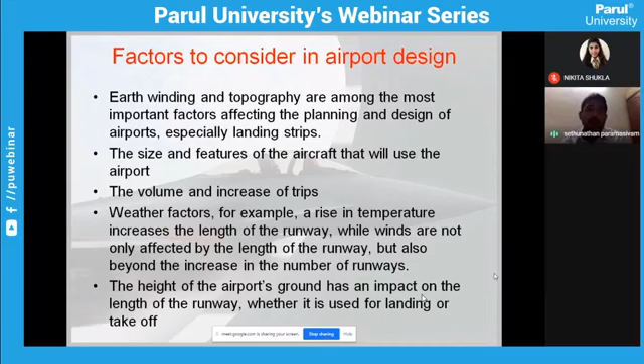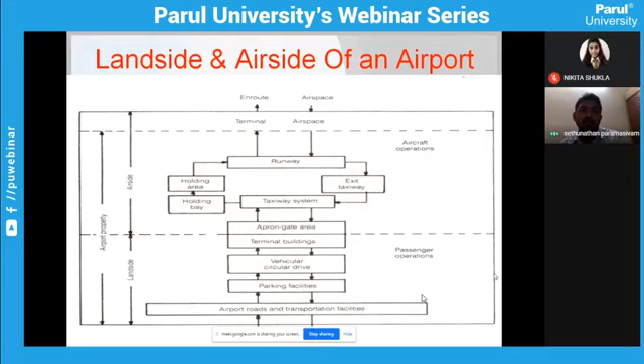We'll explain a little more between the slides - there's lots of explanation for this. I'll just take a few example airports, so it's easy for you to understand. There are airport types based on the type of aircraft - maybe single engine, multi-engine, medium jet, heavy transport, or general transport aircraft.

For example, if you take Delhi Airport, it's open as a general transport airport. The reason is you can land and take off any type of aircraft in any situation, because of the lighting systems, runway condition, and weather forecast - everything is applicable for that.

A very important thing everyone is supposed to know - this is the ICAO rule, the convention of the International Civil Aviation Organization. This aerodrome and airport design comes under Annexure 14. Everyone is supposed to remember this if you think about airport and aerodrome design. Annexure 14 includes lots of chapters below it.

Volume 1 states aerodrome design and operations - there are 10 chapters included in that. First is general, then aerodrome data, physical characteristics and obstacle restrictions, visual aids for navigation, obstacle clearance, and electrical systems. These are all the major criteria coming under Annexure 14 about aerodrome design and operations.

Airport terminologies - everyone knows about the terminologies, I think most things are familiar. Terms like airfield, aeronautical beacon or aerodrome beacon, apron, approach surfaces and blast pads, clearway, displaced threshold, and so on. And then planning.

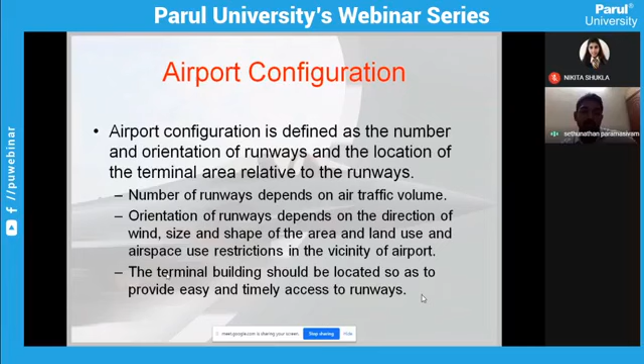That's why it's called an airport layout plan. And airport configuration, we already talked a little bit about that, so I won't mention the same thing again. The major factor you always need to concern about is the size and shape of the area. That's a very important thing. And terminal buildings, and airfield concept.

That is, for example, in Bangalore, we have parallel runways. The major purpose of that is to reduce traffic, because today the aviation sector is booming, so there's lots of traffic. You can't manage with a single runway. That's why they depend on parallel runways, called parallel runway, 4 left and 4 right.

For example, if the airport has three runways, they mention one more runway in the center, normally mentioned as 4 Charlie, which is nothing but 4C. That's why it's called 4 left, 4 center, and 4 right.

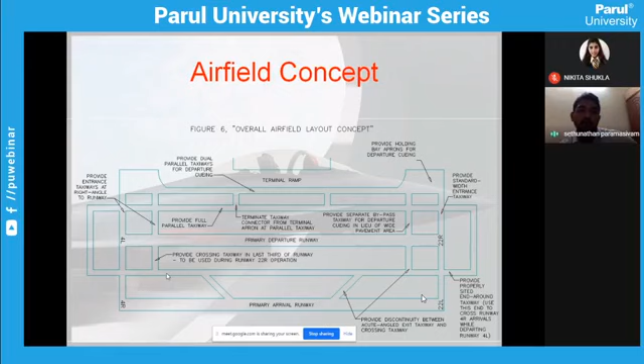In case the wind is not favorable to 4 left, the departure happens on the opposite runway. That's why you can see on the right side, 22 right and 22 left. This is the way the airport layout can be analyzed for whether it's for departure or arrival.

Again, we further move ahead with this. This is the basic thing you need to know. I'm not aware what kind of students you are right now, because you may not have the idea how they construct this runway design.

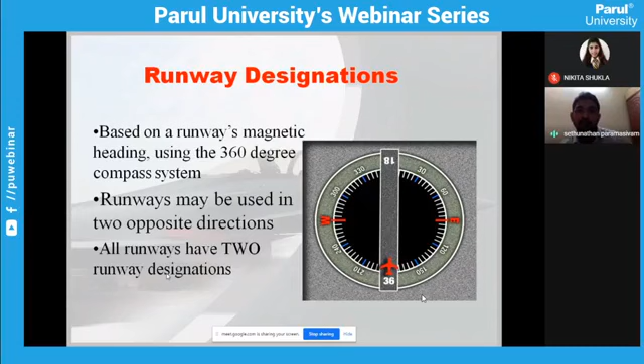On runway configuration, there are lots of runway configurations, whether it's a single runway or parallel runway. For example, single runway at Vadodara, and so many available in India. Most major airports have single runways and parallel runways. In India, Bangalore has parallel runways, Shamshabad Hyderabad has parallel runways. That may be two parallel runways or four parallel runways, but we don't have much four-runway setups over here.

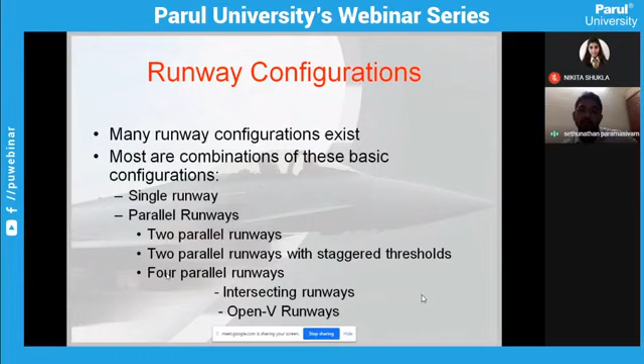And open V type, maybe open V type, we can see right now, I have some pictures. We already explained single runway. If the airport has less traffic, less passenger travel, and no much cargo transportation, they use a single runway. In future, if needed, they will extend the runway to a parallel runway, another parallel runway, or give a cross runway like in Chennai. We'll go with that slide for the cross runway.

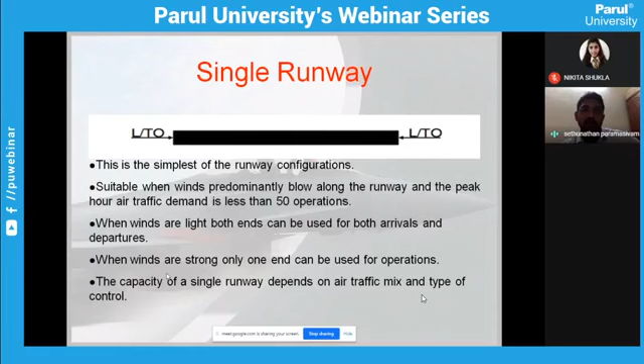You'll get a fair idea about it. And four parallel runways - we don't have four parallel runways here in India because we don't have much space and facilities over here. That's why we don't have that four parallel runways. Right now we have two parallel runways, and converging runways we have in a few airports.

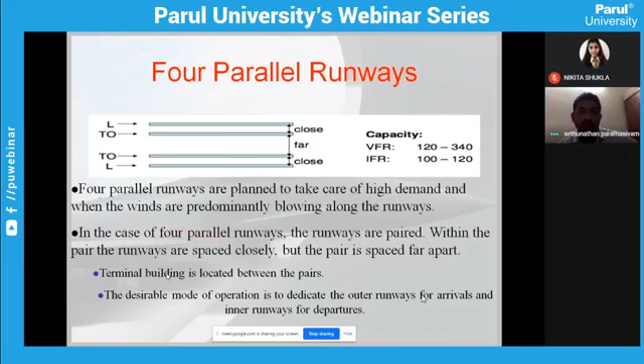This is an example for your understanding. This is Los Angeles, California. You can see in the right top corner, Los Angeles, California, you have four parallel runways. That's nothing but you can see from the top, you can see four dark lines, right? 1, 2, and 3, 4. This 4 is runways, usable as 6 left and 6 right. And if you come to the bottom, it's 7 left and 7 right.

The reason they are using this here is it's a very huge runway. The major reason behind this is huge traffic. This is the major airport in Los Angeles, California, that's why the transportation of people is much more. Even the airport design is more complicated. If you go ahead with the design, even the terminal building is not a single terminal building. I've explained this further in the upcoming slides. You can see that. This is a little bit messed up, but you need to understand a few things.

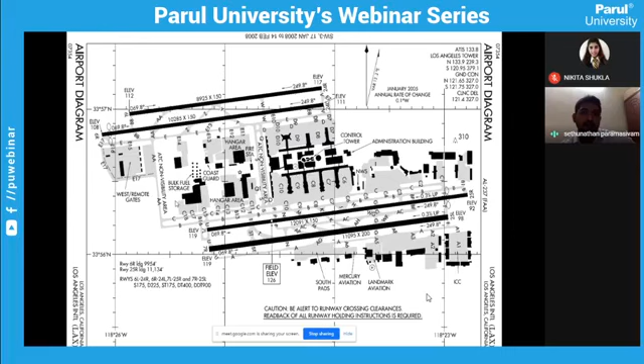The importance of parallel runways is you can use all four runways for departures and landing. There are no restrictions because you have sufficient wingspan distance for aircraft to land and depart on both runways, since there are different instrument procedures and air traffic control services available for these runways. That's why there is no delay in departures and arrivals.

That's why they give this kind of configuration. This is the configuration of parallel runways - closely spaced, intermediate, and far spaced. This is nothing but the spacing between the runways. You need to have the minimum width to avoid the wingspan touch. You know aircraft wings have very huge dimensions. If the aircraft is supposed to land on the parallel runway, the wingspan needs to be sufficient.

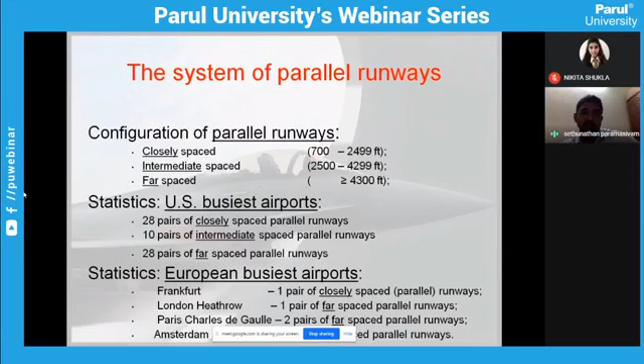For example, I've given some statistics of US busiest airports and European busiest airports. You can see a few of the US busiest airports have 28 pairs of closely spaced parallel runways, 10 pairs of intermediate, and 28 pairs of far spaced. And a few from Europe you can get from Google about the statistics of the busiest airports. The systems of parallel runways - same thing I already explained.

This is the intersecting runway. The drawback of the intersecting runway is, if one runway is in use, you can't use the other runway as a parallel runway. For example, you can see this.

You can able to visualize, Nikita. I can move the slides with the hand cursor. Nikita, are you with me? Hello. Yes, sir. Okay, fine.

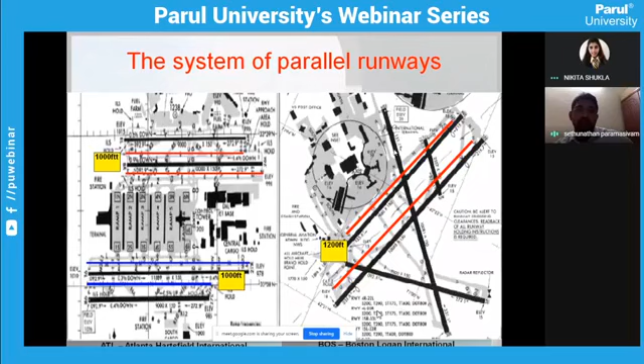That's fine. We have two parallel runways, but we have two intersecting runways. Normally, when wind conditions are favorable, they'll use only these two parallel runways. In case the wind is not favorable for these conditions, they will use the alternate runway for departure and takeoff. Further, with the approach glide slope - which you may have studied in your degrees - for parallel runways, they're supposed to have an approach lighting system to identify which runway you're supposed to land on while coming for the approach, whether it's a 3-degree glide slope or 5.5-degree glide slope at the maximum.

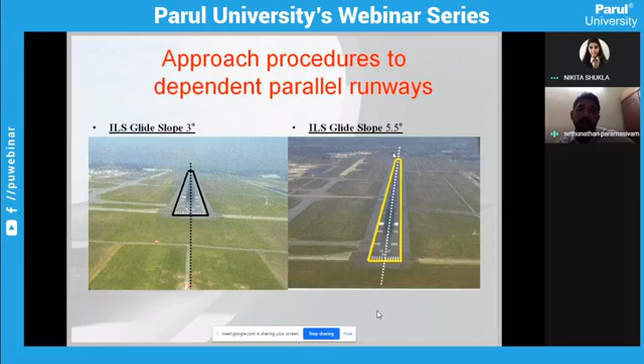This is the single runway configuration. We already explained the designator. This runway is located between 27 and 09. This is nothing but 27 plus 180 is the opposite, and again 09 plus 180 is the opposite. This is the way you need to calculate the runway designator.

If you see a few things, the airport beacon is in the right top corner because all the landings and takeoffs are supposed to be monitored from there, and this is the ramp area to park all the aircraft. The taxiways - most airports are supposed to have parallel taxiways because it's easy for the aircraft to vacate via the rapid exit taxiway and taxi out via the taxiways. There are lighting signals - I have a few slides about this also. We already talked about the wind sock. If you go and see each airport, you're supposed to have the wind cone, which gives the direction of the wind and the speed of the wind direction.

Depends on that, we always take off the aircraft into the wind, not in a tailwind condition, because tailwind is unfavored for takeoff or landing. If it's a tailwind, your aircraft will take a long distance to roll out and stop, which is very dangerous in case there is a possibility of overshooting the runway.

That's why we always suppose to do the takeoff and landing with headwind conditions. We have VASI and PAPI, which is nothing but a visual approach slope indicator. Some few airports have the indicator called PAPI. The PAPI and VASI are alternate usage. This is for your overview.

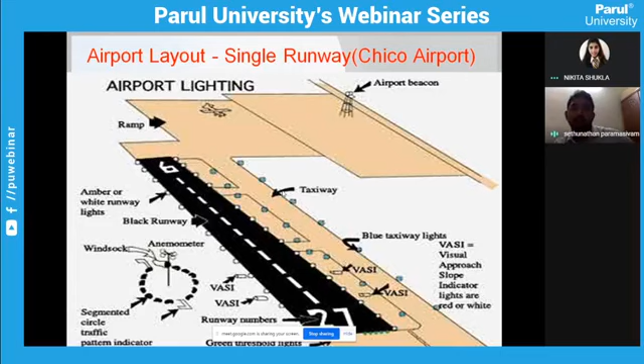I've given this outlook, and a few more things, the lighting system, I can explain here itself. If you can see the edge lights of the runway, you can easily identify with the white light, because you're not going to confuse the runway and taxiway even though both look like parallel ways. The runway is always located with white edge lights, and the taxiways are supposed to have blue edge lights. It's the easiest way to identify whether you are on the runway or the taxiway, because it's a very important factor to understand the runway design.

Okay, your hometown airport. This is the layout of Vadodara and the aerodrome design. The airport is at an elevation of 132 feet. This is the example I already explained to you. They have only one single runway because it's a small city, and the traffic is very less, you don't have much passenger movement.

That's why they have the single runway. Maybe in future they may extend the runway. They may come up with parallel runways or crossover runways. It may be a possibility.

If you take the runway designator, you can see runway 22 and 04. This is nothing but 22 plus 180, opposite is 04. Again, if you put 04 plus 180, it's 22. This is the way your opposite designator has been assigned.

If you go ahead with that, for example, if the approach is on 22 and you are landing this aircraft, you have the aircraft exit via the taxiway. They have taxiways called Delta, Charlie, and Bravo. They will exit the taxiway and go to the terminal building, whichever side they are given, because they have apron buildings over here, apron 2 is here, apron 1 is here, the new terminal building is over here, university, right?

This is the elevation given in the runway, because elevation also matters when the aircraft lands. If the slope is very high... for example, they've given the slope for runway 04 - there is no slope for 04, and also no slope for runway 22, because the airport doesn't have any slope deviations.

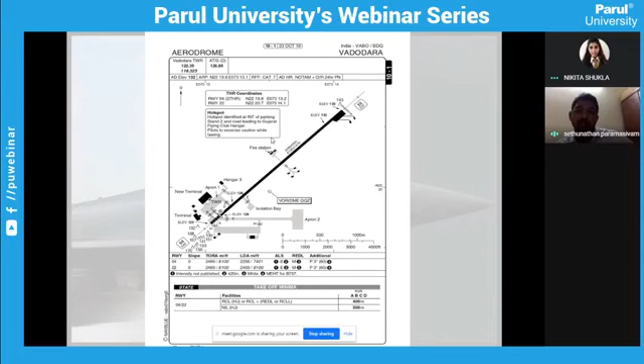Mandatory features for the airport - you have the terminal building, and the fire station is located over here, because it's a mandatory aspect for the fire station to be active all the time, in case of any emergency they're supposed to assist us.

And this is the approach procedure. This is a little bit complicated to understand. We already explained runway 22, right? That means the aircraft is right now landing from the right side of the runway, 22. We have some approach procedures for the aircraft to land over here.

The obstacle clearance is very, very important for the runway designators. If in the approach path you have the biggest building or tower or any mountains, it's very hard for the aircraft to land. They're supposed to be very familiarized before they do airport design, and supposed to go ahead with all this procedure.

For example, you can see the highest peak is 2625 on the right side. You can see in the diagram the highest peak of the area mentioned here. That means you need to consider the obstacle clearance also as a factor.

This is the approach procedure for ILS runway 22. I hope you studied in your systems and instruments about the instrument landing system procedure, that is nothing but your ILS. That's why it's being mentioned as ILS runway Zulu 22.

Okay, this is the various parameters for this - you don't need to understand much about it. This is mainly used by pilots to land the aircraft at the specific airport, whether it's in good weather conditions or low visibility conditions.

Again, the next slide coming up is runway 04, because we already talked about runway 22. Now we are talking about 04. There is an approach for this runway, which is only VOR.

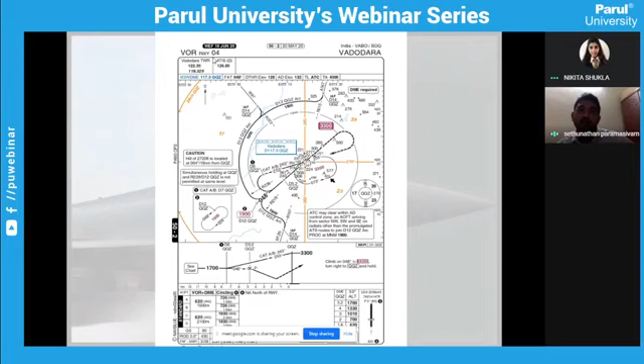That is nothing but very high omni range frequency, VOR. Again, this is just for your understanding. I've given these two approach plates to understand how they do the approaches and what factors they need to consider.

And moving forward, this is another example. We already saw the single runway. This is a merging runway. For example, Chennai International Airport has two runways, but they are not parallel runways. They have intersecting runways.

This is the major runway for Chennai, 07 and 25. Most of the time, the wind favors Chennai around 07 and 25. In case the wind is not favorable to these positions, the traffic is very high since it's a very huge, big city. That's why they can use the alternate runway, 12 or 30.

Okay, this is the designators. We already mentioned that in case runway 07 and 25 is in use, runway 12 and 30 will be closed all the time. They can't do parallel approaches because the aircraft is supposed to exit at this intersection, and you can't stop the aircraft at that position.

A few international airports in foreign countries use what's called land and hold short operation, but this is a very difficult operation. They're supposed to stop the aircraft before reaching the runway threshold. That's why we don't use it in India. We just use one runway for the approaches, which is why they mention 07 and 25 most of the time.

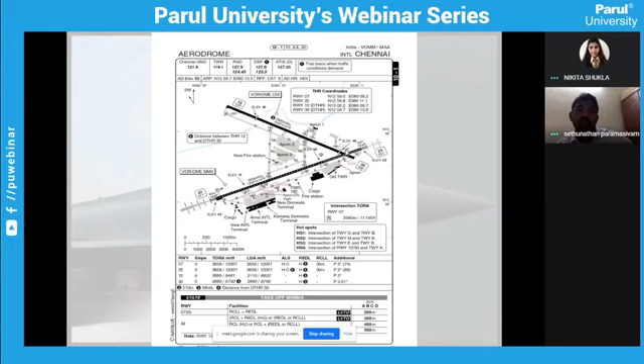Each aircraft has some limitations for crosswind and tailwind factors. That's why, because it's the busiest airport, they use a parallel or merging runway. Another important factor to consider is land space. Since Chennai airport is located within the heart of the city, they don't have sufficient space to construct a parallel runway, which is why they built an intersecting runway.

And this is the VOR approach, which we already explained—this is for VOR runway 25. As for the approach procedure, I explained before there's no real need for you to understand it in detail; this is only from the pilot's point of view. This is given mainly so you understand the highest obstacle.

Here it's 667 feet; there's a lighted obstacle over here. Whenever you are landing on this runway, you need to be careful about this obstacle. That's why before construction, they're supposed to survey what obstacles are nearby and anything unfavorable to the situation.

Again, in the charts, this blue color represents the seaside, because the landing approach comes from the seaside—that's why we go on runway 25. For example, if the approach is from 25, this is an over-the-sea approach. But even in this sea approach, there's one small obstacle here at 667 feet.

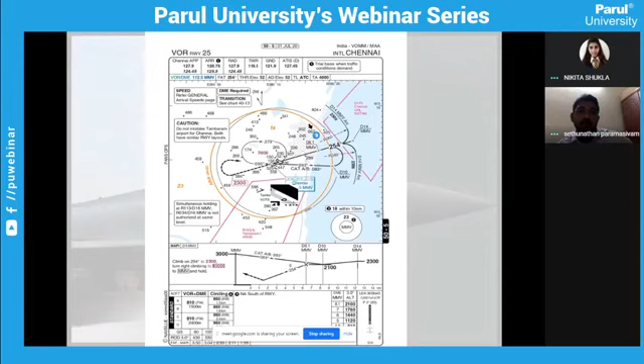And another thing, this is the Long Beach runway. This is one of the busiest airports in California—I hope you're aware of it. They have a total of 5 runways. Here, if you look, you have 2 parallel runways called 25 right and 25 left.

And there are another 2 small runways, used only for small aircraft or training aircraft, but not all runways are used at the same time. Another, the biggest runway, 30 and 12, is a 10,000 feet runway. All these dimensions are mentioned in feet.

That's why it's mentioned here 10,000 feet into 200 feet, because for the international aircraft to land, there is only one single runway. Once this single runway is in operation, all the 4 runways are being closed all the time. If the wind is not favorable to this international aircraft's landing procedure, then the usage of runway is supposed to be 25 right or 25 left.

But in this case, you can use both runways at a simultaneous time because you don't have any objection. The length of the runway here is 6,192 feet and 5,423 feet. That's the reason they are using this concept, whether they can use 2 parallel runways, or while the training purpose is going on, they will use another 2 runways, 3-4 left and 3-4 right. If the international operation is happening, they will do only one approaching procedure for runway 30 and 12.

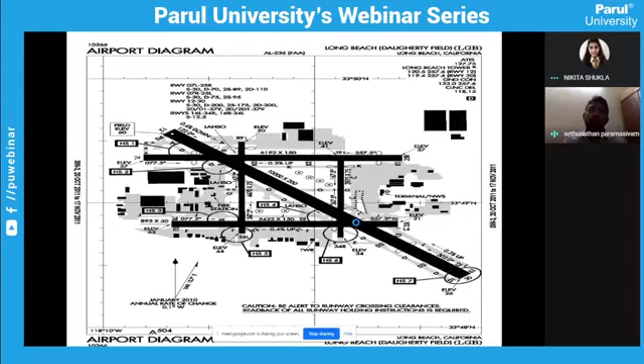This is the hotspot. Very important factor to understand the airport design is the hotspot. The main understanding of the hotspot is between the runway and the taxiway. Whenever you are exiting the runway from taxiway, or whenever you are entering into the runway, the important factor is the hotspot. You need to update where you are. If you miss this hotspot location, they will mention the numbers. If you have runway designated, I will explain to you all these hotspots in the further slides.

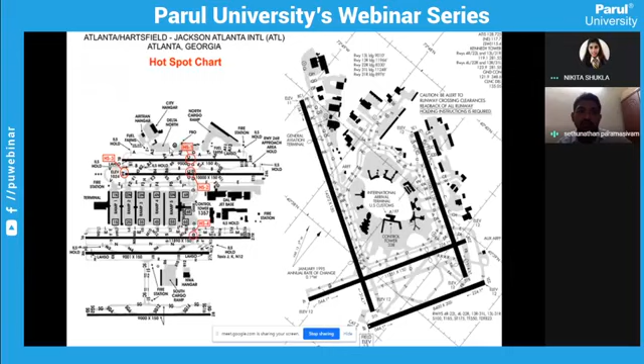And major components of the terminal, you know about that. I don't want to waste so much time over here. You know all that - apron, including gate parking position, aircraft servicing area, taxi lanes, and ground servicing and fire extinguisher equipment. And this is the various concepts.

This is another thing to understand for airport passenger terminal and aprons. Now they are going with different concepts called the satellite concept, pier concept, linear concept, transporter concept, and hybrid concept. Depends on the passengers' needs and total number of passengers to the airport, they will consider this kind of concept.

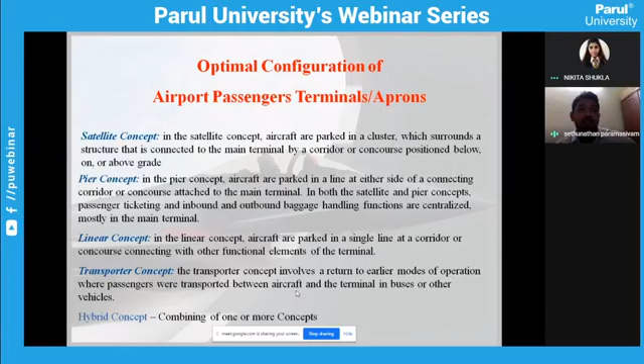I have a few images for that. This is the linear concept - that means you have the passenger terminal over here, and the aircraft is being parked in a parallel way. This is the linear way. Then transporter - the aircraft right now, it's all being parked like this. You have the finger or whatever, it's been directly connected to the aircraft. You can able to board and deboard the aircraft.

And again, the transporter position - this is nothing but you have the aircraft transporter. It's supposed to be one by one. This is not in the parallel. Again, this is the third one.

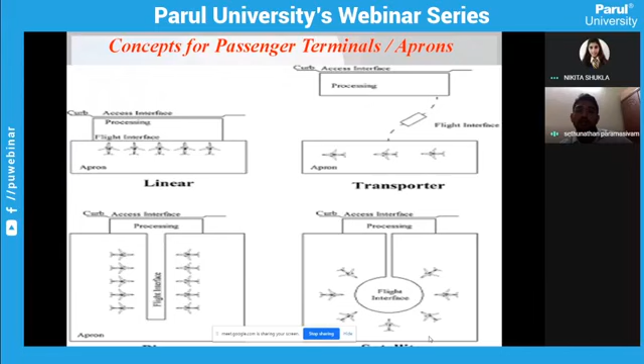This is the pier concept and satellite concept. The pier concept is nothing but the passenger terminal, passengers are coming all the way here, and there are two positions, or it's supposed to be like a mirror image of the parking position. Again, the satellite concept is supposed to be like a satellite - it's a 360 degree view. Passengers come all over here and they can board the aircraft. For each aircraft they've been designated with a number, like 1, 2, 3, 4, 5. It depends on the airport category. Again, it's one of the very complicated airport designs.

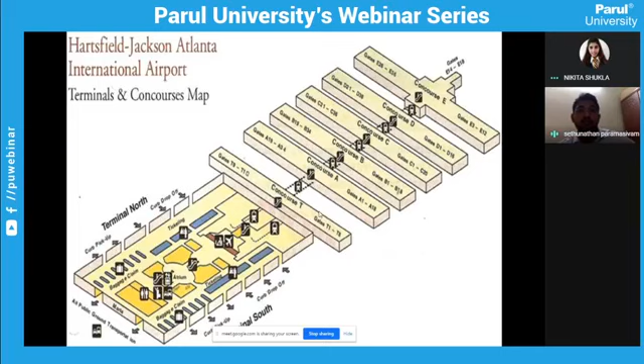Here you have the north terminal building and south terminal building. Because of the lots of passenger movement, they divided into terminal buildings like north building and south terminal building. Once the passenger is being accounted, they'll be going all the way to the gates. They've been classified with gates for different categories. This is almost a kind of pier concept again.

And this is Hartsfield-Jackson Atlanta Airport. This is another example I've given just for clarification in depth of what all things will happen, because you need to have the baggage claim area, ticketing area, and security screening.

For each terminal building, they give it to some airlines. For example, they can assign Air India to Terminal 1 and Indigo to Terminal 2. Like that, they will give different categories of airlines. It's easy for them to board and go for the aircraft.

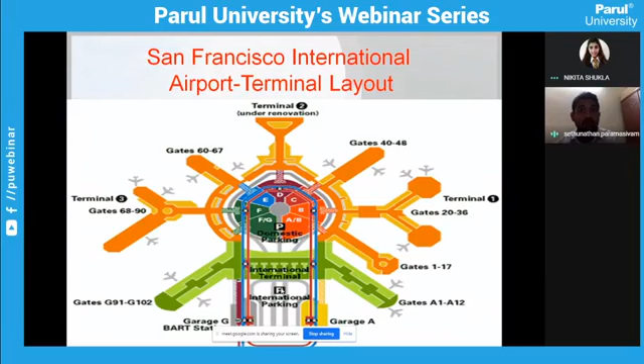And this is a satellite view concept - it's for San Francisco in USA. They also have the satellite configuration because of the largest movement of passengers. This is also a very big international airport, and they have parallel runways. That's a multi-specialty of this airport.

I gave some ideas for your pier concept and satellite view, those things. Okay, I already explained to you.

We have so many operations like civil passenger aircraft. We have cargo aircraft flying for international sectors, carrying very big jumbo jets. Again, you have lots of small planes for your training purposes.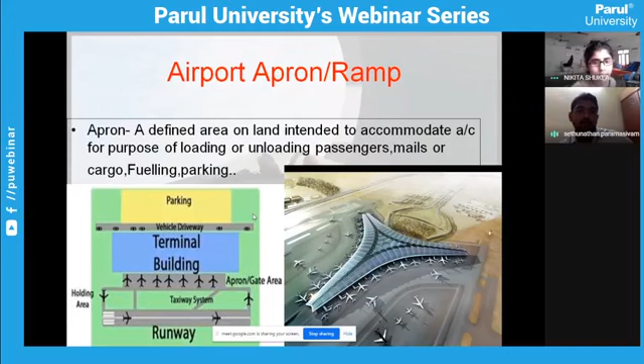And types of airport aprons, you have different categories. You can go ahead with that. I don't want to waste much time here.

Planning and size, this is also an important factor. Design requirements of apron - this is very important to consider in the airport design. First is safety. You need to be very concerned because, for example, if you have fuel services to the aircraft, safety is the priority over here.

And efficiency and geometry, because you need to consider the aircraft's length and the aircraft's wingspan. You can't park aircraft in parallel if the wingspan is huge. And flexibility of the range of the aircraft and common design factors.

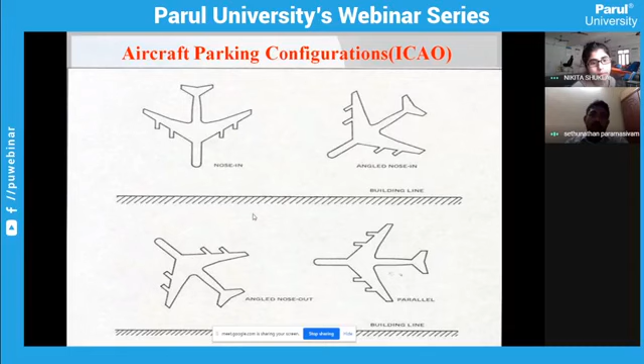And aircraft parking configurations, we already talked about it. This is the way they have the nose-in. Everyone knows the hangar is mainly used for aircraft servicing, maintenance, or overhaul. Anything we can use it for, but you need to have the plan of the hangar.

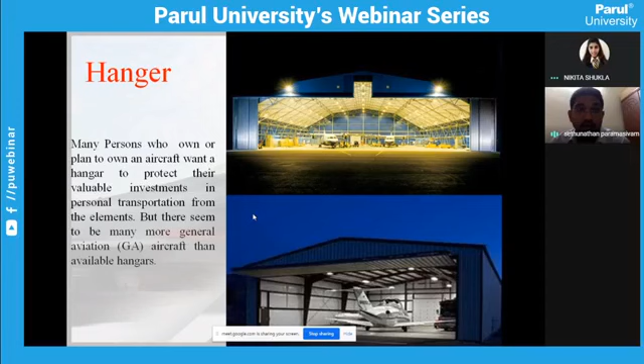But in each airport, you don't have a hangar for all the airlines. Different airports have hangars given to different airlines for their service, maintenance, and overhaul. Okay, and on these trucks, I think I'll skip a few slides. I'll go to a few things because I already explained to you land and hold short operation.

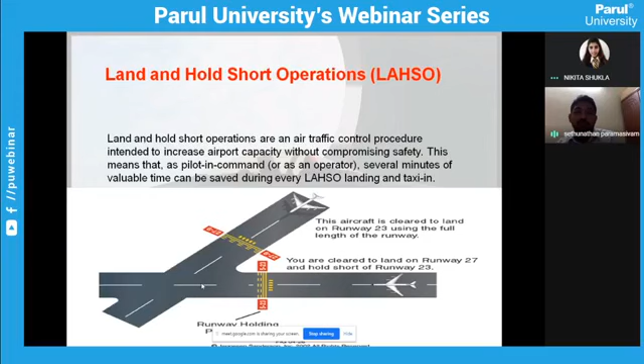There have been lots of incidents in previous years due to low visibility operations, where you can't see where the aircraft is supposed to stop. In that case, land and hold short operation should never be used.

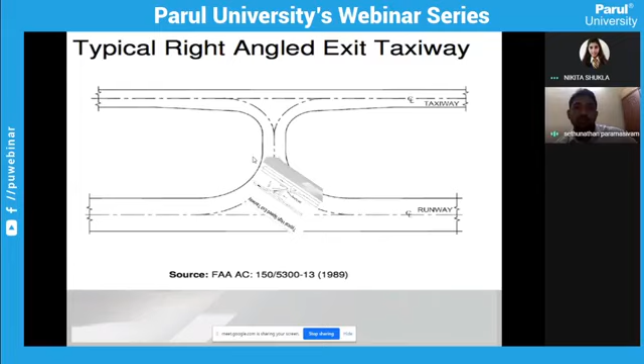Taxiway systems - we already know there are different types of exit taxiways. I will give some pictorial representation that's easier for you. We already explained: the top one is the taxiway and the bottom is the runway. You need to connect the taxiway with the runway using a circle option. You have a few markings in that - I'll show those markings in the further slides.

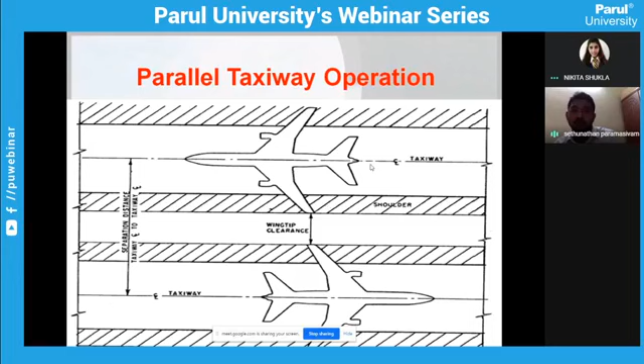We already explained if you have two parallel runways, it's marked with the numbering left and right, with the marking of L and R over the runway designator. For taxiway entrances and bypassing, whichever it's not already explained, if there are two aircraft departing and landing, you're supposed to have proper wingtip clearance, because this clearance has already been designed in the airport design concept. You need to be aware what kind of aircraft are approaching the airport, whether the wingspan is sufficient for parallel operations. If the wingspan is huge, you can't do parallel operations in this airport; you're supposed to go with single operations.

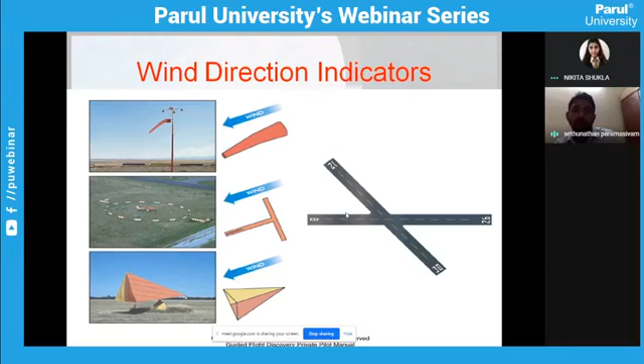A few things I'll skip because of time limitations. I don't think we can cover all this, but I'll try my best. We already talked about the wind direction indicators, which you need to assign in each airport. Depending on wind direction, they will select which runway is favorable for departure or landing on that certain day. And airport circuits.

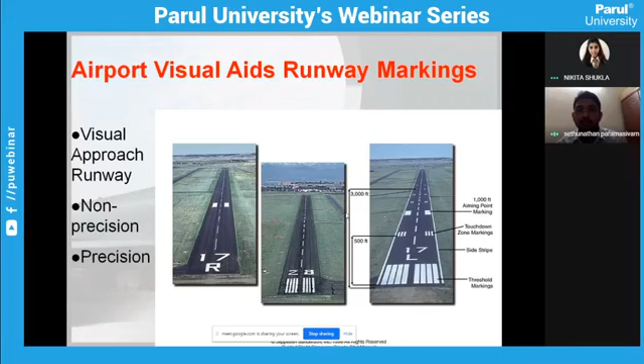And visual approach lighting system. This is the kind of runway we already explained. If there are two parallel runways, you can see 17 left and 17 right, meaning there are two parallel runways in that airport, and they use both runways in parallel operation. And jet blast.

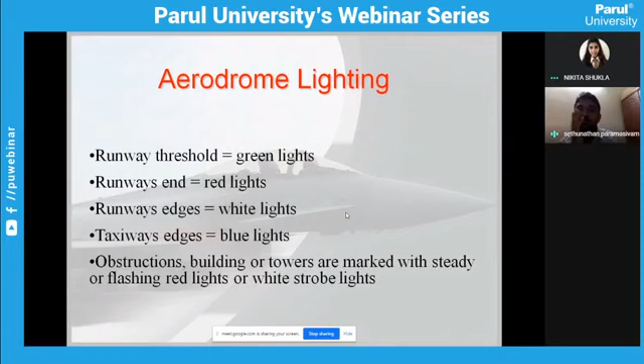Aerodrome lightings. These are all the basic lighting colors they use. The end of the runway is always red, indicating danger. Runway edge lights are white, taxiway edge lights are blue, and taxiway center lines are always green. Even threshold lights will be in green color.

Taxiway surface markings, used in daytime operations. You don't have light operations during the daytime, that's why we always have markings with yellow lines. You need to follow the yellow lines.

And blue lights. These lights are always used for low visibility operations and night operations, because in low visibility you can't see the center line and the sides. That's why we use lights for the highest precision during taxi, takeoff and departures.

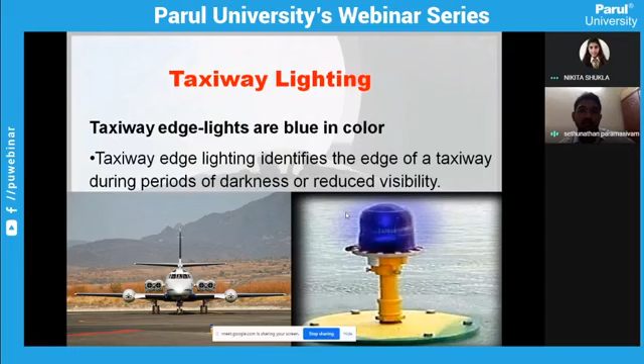If you do a land and hold short operation or ILS operations, you have two solid yellow lines and two dotted lines. I already told you the solid line is your side; you're supposed to stop the aircraft before the solid line. You can't cross the line until you get clearance from the air traffic controller. This again relates to ILS category aircraft.

Again, I explained this already. If it's so sensitive, for example you have Cat 3C landings going on, the precision of the approach is very high. At that time, you can't cross this marking. That's why you have one more marking called the critical area. You can't cross the critical area position.

And designators, we explained the same thing already. Boundary sign: once you want to exit the aircraft from the runway, you need to be clear of this solid line. As I already told you, whether entering or exiting, this marking is very important. You need to be out of the solid line, not out of the dotted lines. The same procedures apply for different areas.

This is the no entry sign. Whenever the airport marks no entry, they have a circle with a small line. It indicates the no entry position.

Let's start with closed runways. If the runway is under maintenance or work in progress, they will close the runway with a marking of a yellow cross, so everyone understands this runway is not in use, whether it's a runway or taxiway. Either way, it's marked with cross circles.

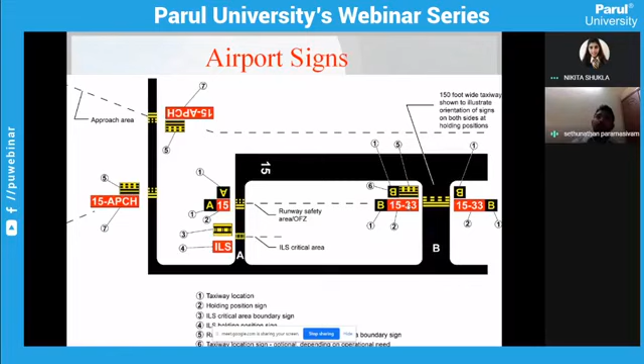This is a runway designator. That's why it's marked as runway 15 and 33. That is nothing but 15 plus 180 is 330, which is nothing but 33. It's the opposite runway. That's why they mention 15 is the opposite runway and 33 is the opposite of the other runway.

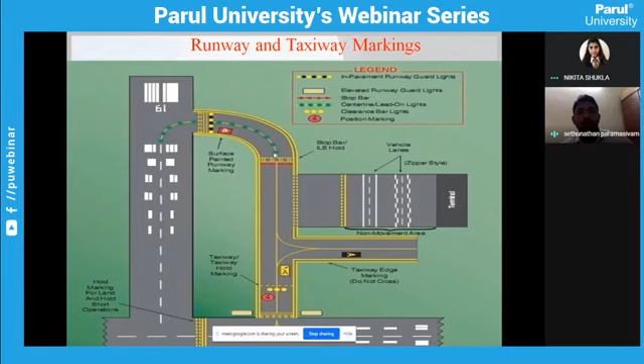We already explained the lighting system, also the same thing. If you see that runway, if you are coming from the runway, if you're landing, if you exit from the taxiway, you're supposed to have the green light in the center line. We already explained about the hold short operations and airport lighting. This is not required because I've included a few other slides for my air traffic control presentation, but we're not going to cover that.

Anyway, I hope I covered all the topics about the airport designs. In case if you have any queries or anything you want to ask, you can ask right now. Is it okay, Nikita? Yes, sir. Okay, that's good. Anything you want to add?

Sir, we have one question regarding that. In India, which company is working on this airport and aerodrome design?

Okay, that's a very good question. In the airport and aerodrome design, this has not been coming under the companies. For example, this all comes under the control of Airport Authority of India, AAI. I hope you're aware of it, right? The Airport Authority of India, what they're supposed to do, they will give the design of all the works.

The Airport Authority is a separate unit because there are two divisions in India. DGCA controls only the safety. And the Airport Authority of India considers all the design of the aerodrome. They will initially get the contract from the Airport Authority of India. They will have a certain unit in the airport itself. They will take care of all this work inside the airport.

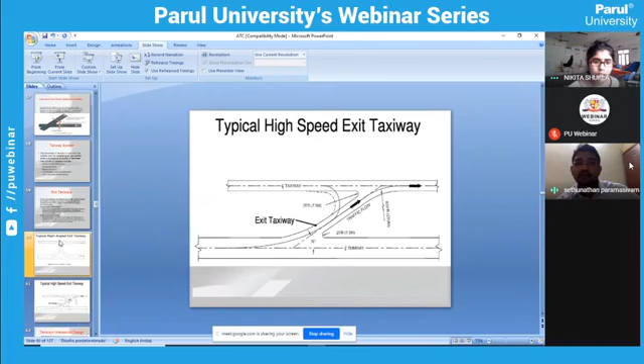This is the traffic flow, you can see the diagram, right? This is the difference between the rapid exit taxiway and the normal taxiway. They can't vacate using a normal taxiway because you don't have sufficient distance to turn around in those short wedges. Got it, okay.

Sir, we have the next question. What are your thoughts about a circular runway which would cover the risk of overshooting aircraft? That's a very good question, but with a circular runway it's not easier to stop the aircraft. The problem is, if you're landing the aircraft, maybe you've seen this idea on YouTube, in the near future people are planning to construct such a runway, but it's not easy because you need to vanish your speed, that's a very important target.

For example, if your approach speed is around 120 knots, that's like the maximum speed you'd go in a BMW car. With 180 or 200 passengers onboard, you can't risk speed reduction because your aircraft is supposed to stop, it's not a BMW or a Swift. You can't stop the aircraft within a designated circle; if it's a circular airport, you can't circle out and stop the aircraft easily. It's not an easy maneuver, that's why feasibly it's very tough. Maybe in the near future some good engineers will think about it.

We have one more question: is it possible to use the slingshot launch that's used on aircraft carriers to launch heavy aircraft? What is a slingshot? I don't understand that word. Slingshot launch used in aircraft carriers to launch heavy aircraft - no, I'm not able to understand that. Maybe I can research it and let you know, post that question to me, I'll cross check and give the answer to that concerned person.